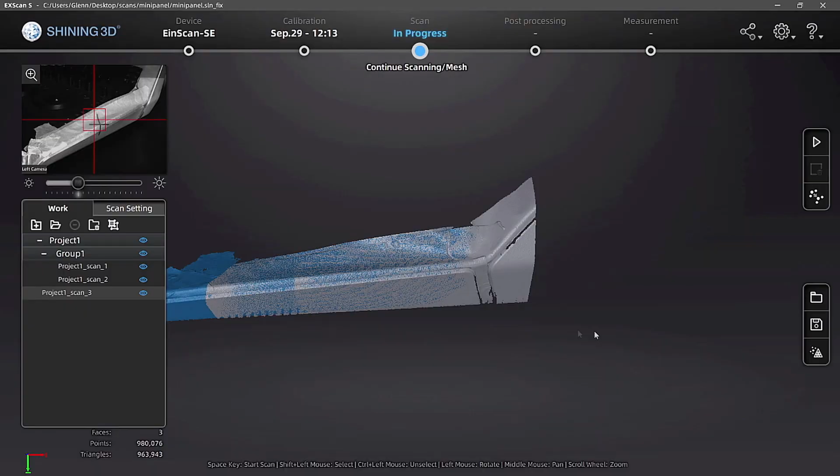In previous videos we have scanned a Resolve mini panel. We have used that scan to build a box for the Stream Decks. We then changed our mind about that box and we rescanned the panel to get a more accurate scan, and build a box that was more of the curved shape of the Resolve mini panel. Along the way, we took that shape that was very flat on one side and decided we were going to make it more curved so that the Resolve mini panel would sit a little closer to the edge.

At the time, you'll remember I said I don't think I'm going to fill in that gap entirely because that will end up being a lot of wasted plastic. Well, of course, I changed my mind.

I have adjusted that curve even more so that the next model you see will have an even bigger curve going underneath the Resolve mini panel. I also adjusted the curve at the top so that this angle is no longer flat. This angle as well has a curve on it to follow the Resolve mini panel. I did those off camera just because they're the same techniques we've been using in other parts of the videos.

So I think it's time we start jumping ahead to the trackball. And today we're going to do the trackball. We are going to rescan the trackball, scanning the side and the bottom of it. We're going to bring those shapes into Fusion 360, and that will help us get an overall shape to help cut a hole in our trackball box. So let's get going and see what happens.

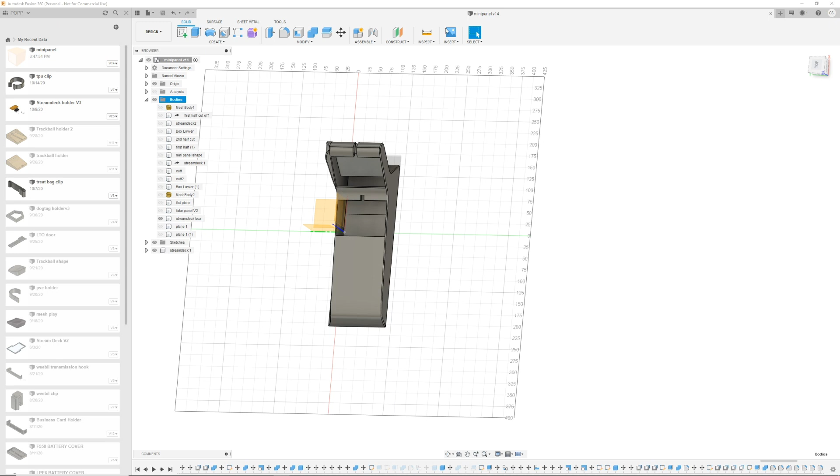We want to put a trackball right into this little section here. The idea being that the trackball is going to sit on an angle that is flush with the angle of the top of the mini panel, and we also have a very specific shape in the trackball. So we want it to sit in this part of the box, but we want it to look nice and custom. So what I've done is I've gone and rescanned my trackball.

I've got a side view and a bottom view of it. We used masking tape and Play-Doh to get a nice perspective and a nice scan on the trackball. And we did 2 different scans, one for the side, one for the bottom.

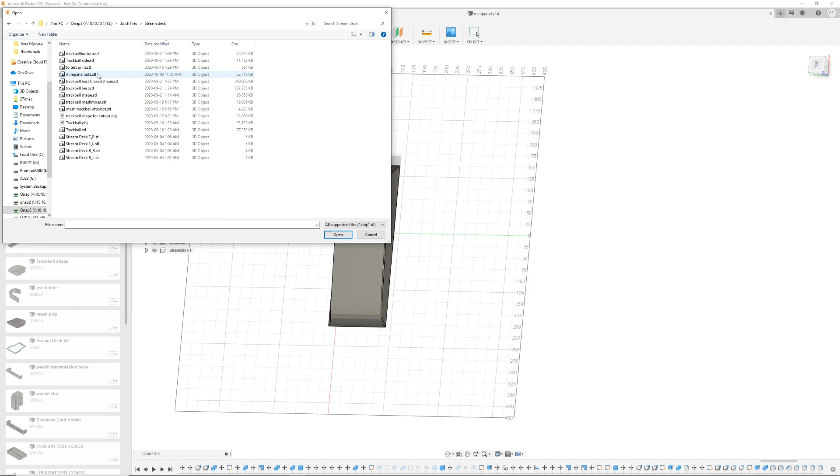So let's bring in the side scan. And once again, I do have to do a little bit of maneuvering to get this to be the right orientation next to the mini panel. So I'll just take care of that.

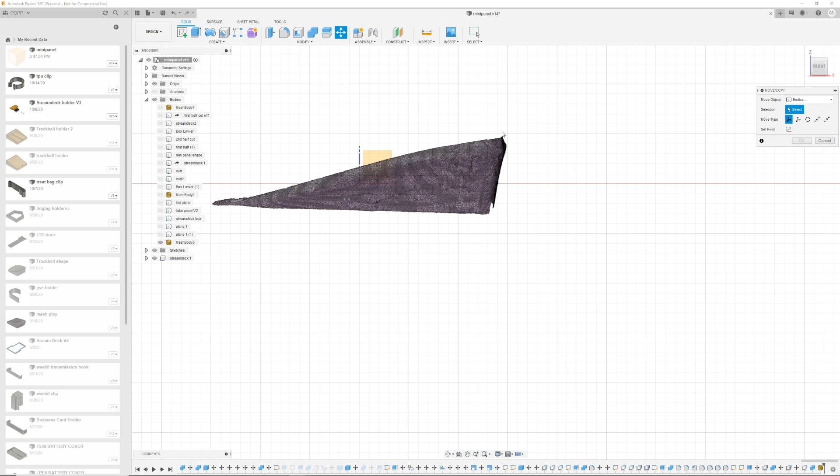Okay, so this is the angle we want to match to the trackball. And we're going to want to angle this so that this is actually flush with the top of the trackball panel, the mini panel.

Our next thing we will have to do is bring in the bottom of the trackball and go through the same process of twisting and turning and spinning and flipping and rotating and trying to get it nice and flat on our drawing.

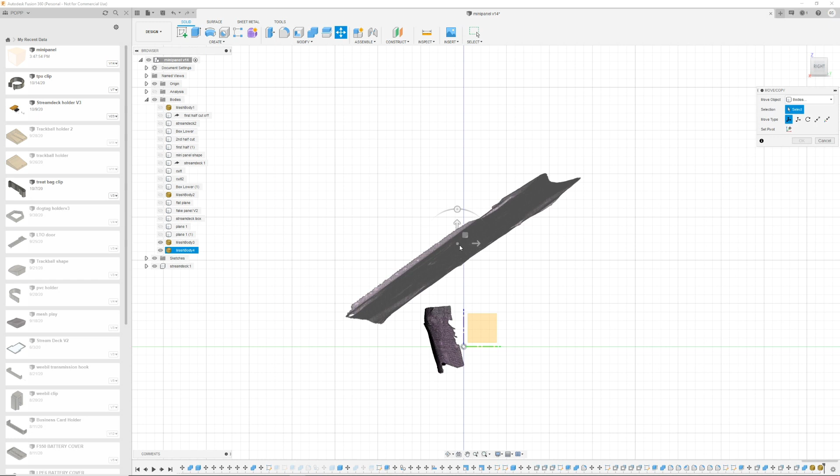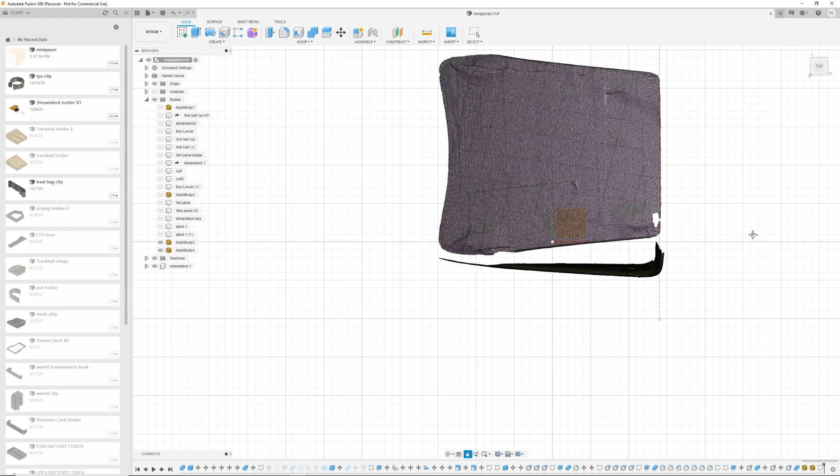So once again, I will work on this and we'll get it into position. So that's pretty good. We've got the base lined up and we have got the side lined up on this angle. So together we should be able to build something now to get this trackball shape into our system.

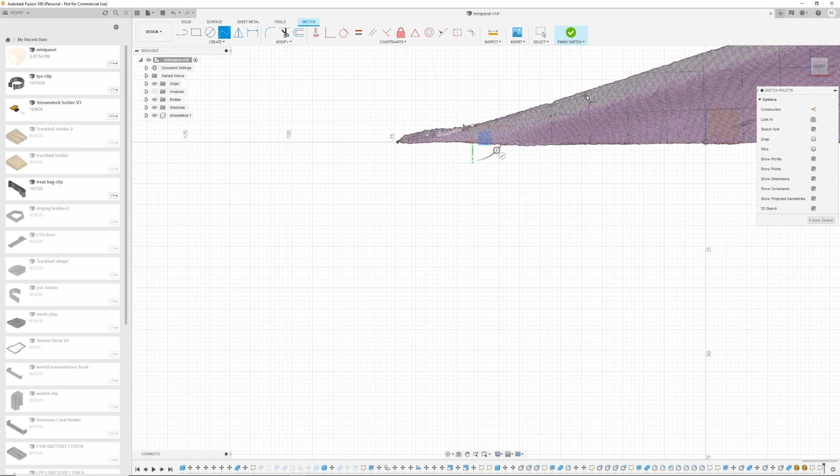So we're going to do the same thing. We're going to build a sketch. We're going to trace out the side and the bottom of the trackball to get a cleaner version now. Again, the scan just helps us get that original shape into the program. So as I whip through this sketch creation, we'll come back once we get this all straightened out.

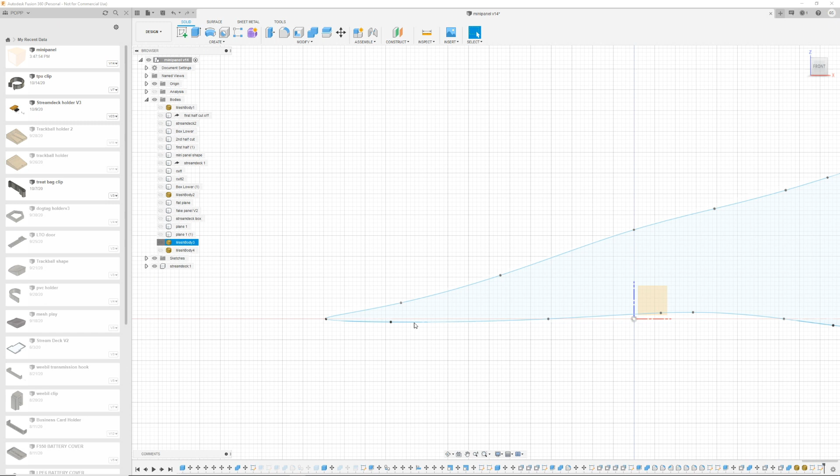And that looks pretty good for the side. Just a couple of minor tweaks here and there. But again, we just want to get that top angle close. We're going to take this and we've now basically extruded that out and get a fake view from the side of the trackball.

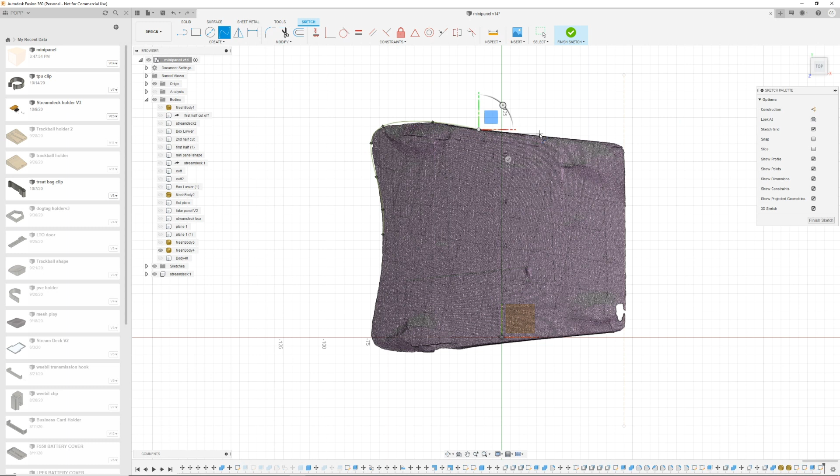And we're going to do the exact same thing now on the bottom. We're going to trace around it, smooth them all out, straighten them all up, and try to get this shape as close as we can to the trackball shape from a bottom perspective.

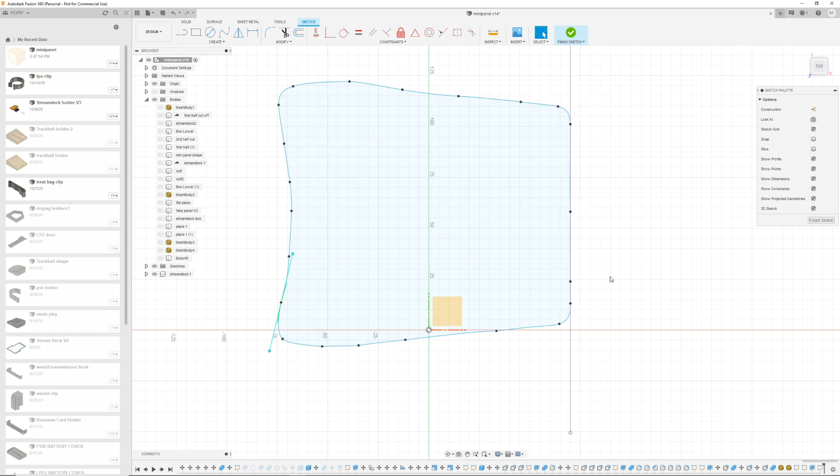Once we have that, we'll do the same thing and extrude it out. It doesn't have to be a specific size at this point, but we'll get it to where we have a fake trackball from the bottom perspective and a fake trackball from the side perspective.

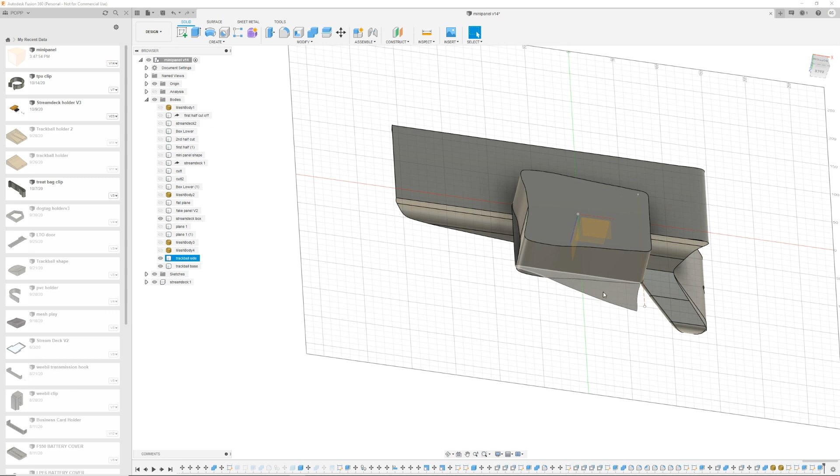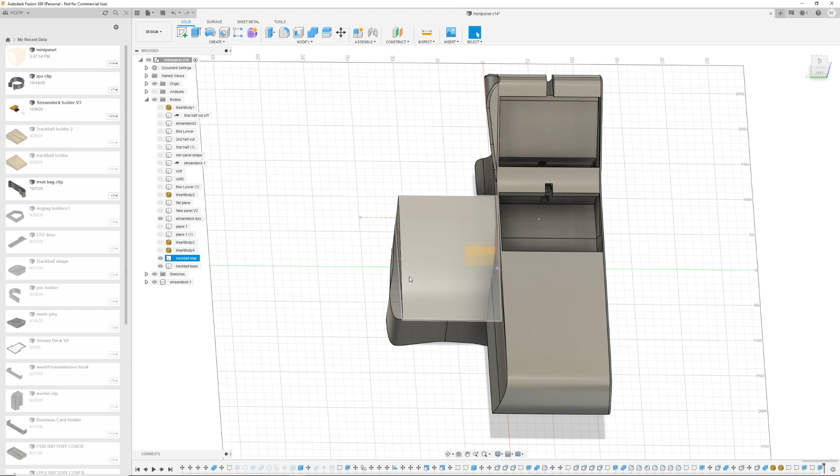We'll line these up now to try to cut our hole into our box. Now what I have to determine is the height the trackball has to sit at in this box, as well as the angle. We can use the side view we've built for the angle, but the height is more difficult because the shape of the base is an arbitrary up and down height.

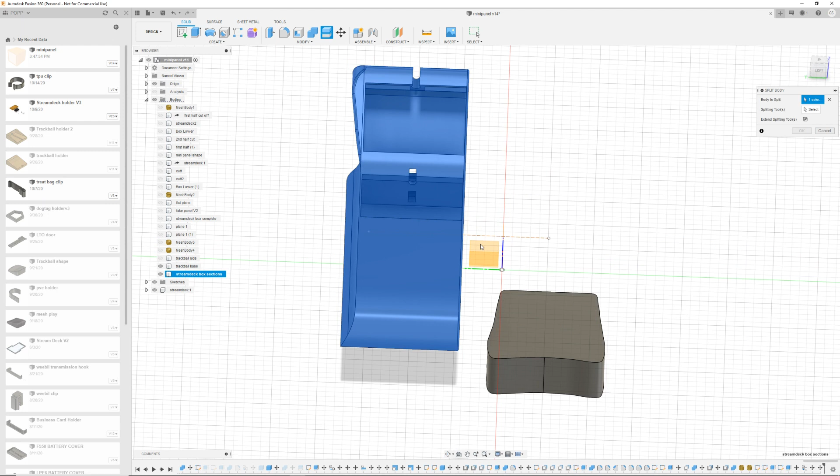I can see right here that we're going to have to extend the size of our box out a little bit, as our trackball is a little bigger than what we had allowed on our original build.

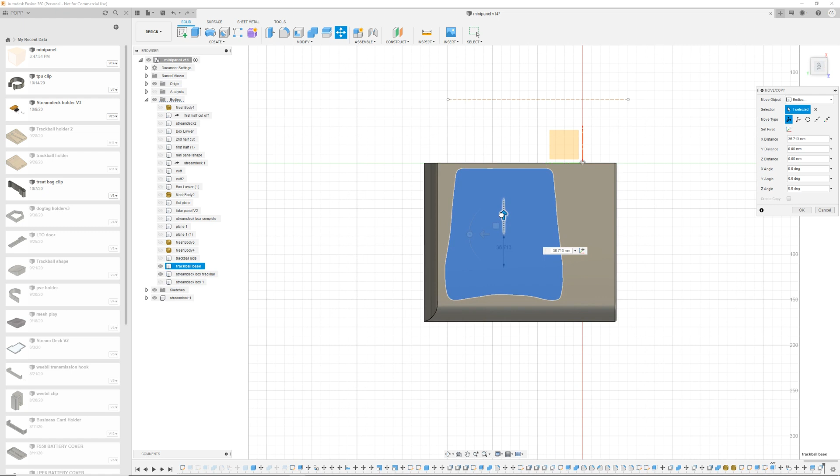Now that we've expanded the size of the trackball section, we can comfortably lay our trackball base into it to make sure it fits. This will be the basis for cutting out a hole in the trackball box.

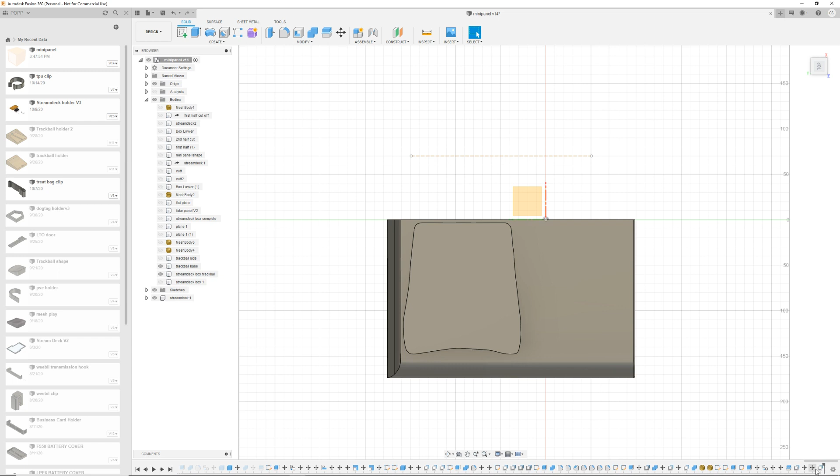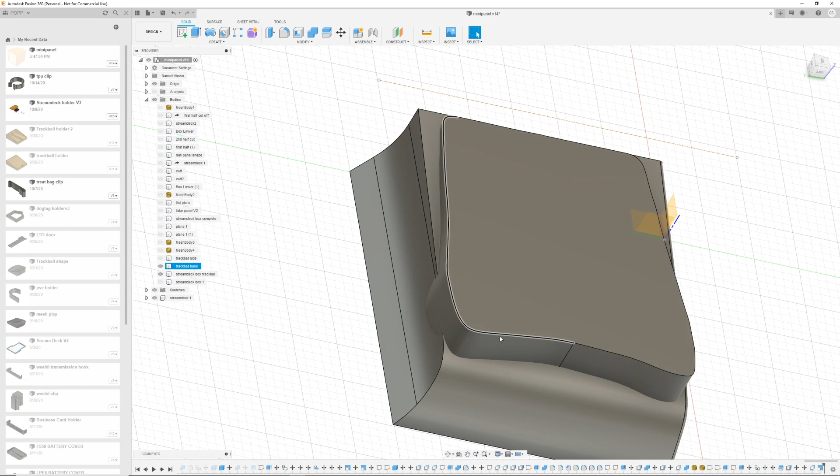To make sure the trackball fits into this hole, I'm scaling up the overall shape by 0.04 millimeters. If I do too close of an exact match to the trackball, it won't quite fit, because 3D printers just aren't that exact in what they're printing. So I'm ensuring I have enough space all the way around for the trackball to sit into this slot.

By expanding that up 0.04 millimeters, I'm faced with the same issue of the box being just a little too small to fit this trackball in. So once again, I'm going to have to extend the size of this box.

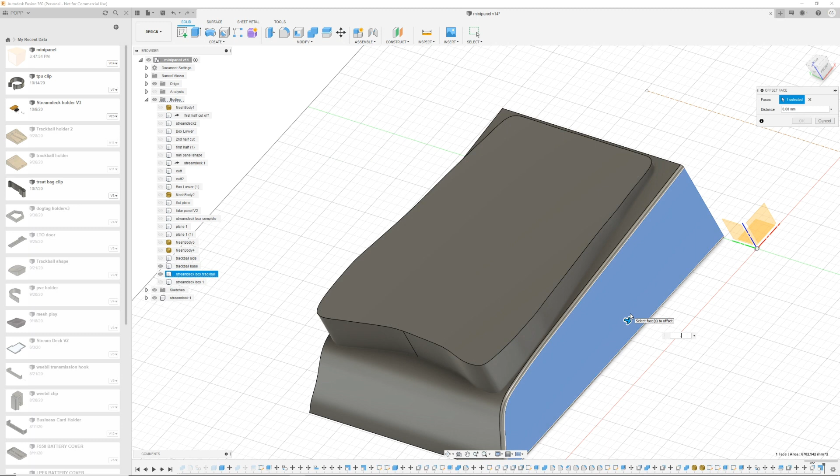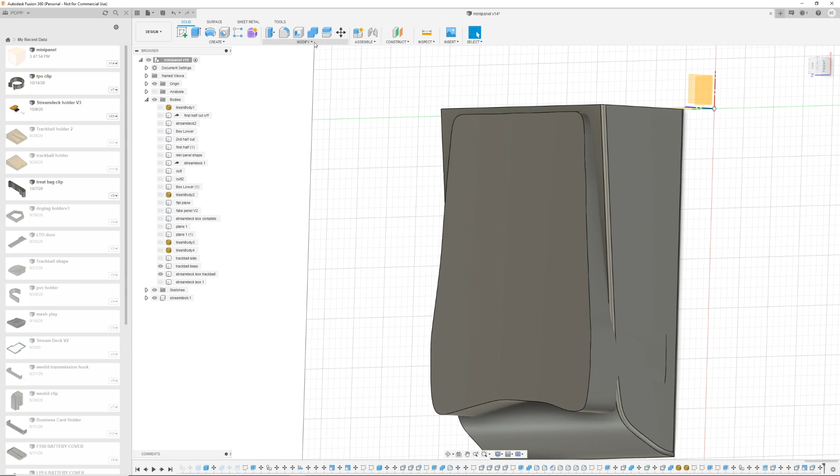We want it to be fairly tight on the sides, but we want to make sure we have some support material on the sides of the box. There's no use in getting too tight to the edge. Let's make sure we have a bit of comfort zone so this isn't going to fall apart if we bump into it. Let's make sure we have some structure on this box.

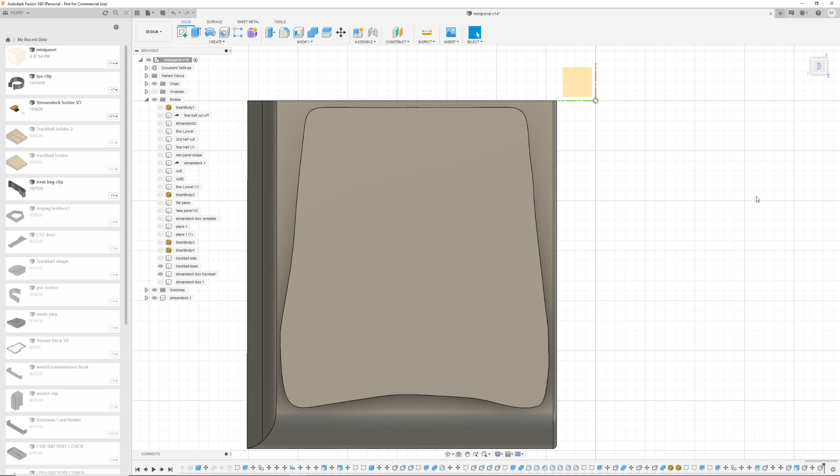Typically I go with 4 millimeters on the sides, I find that to be a nice piece of plastic on a frame to make sure it's sturdy enough. I think we now have a box that is big enough for the trackball to sit in, but not too big that the structure is going to be weakened.

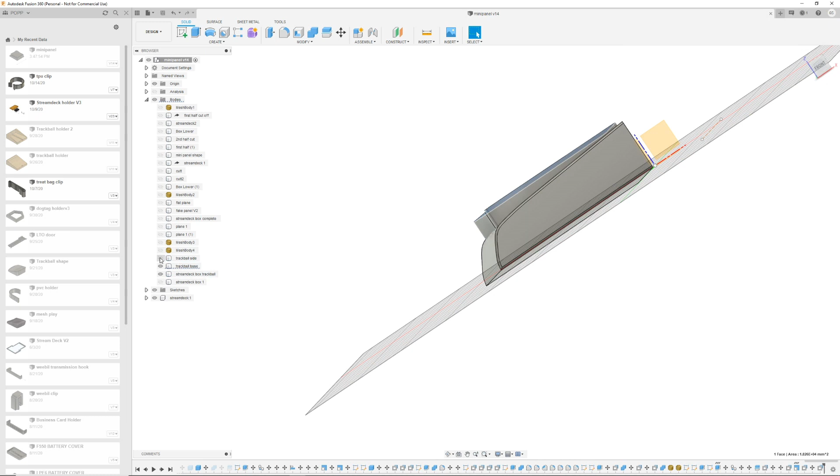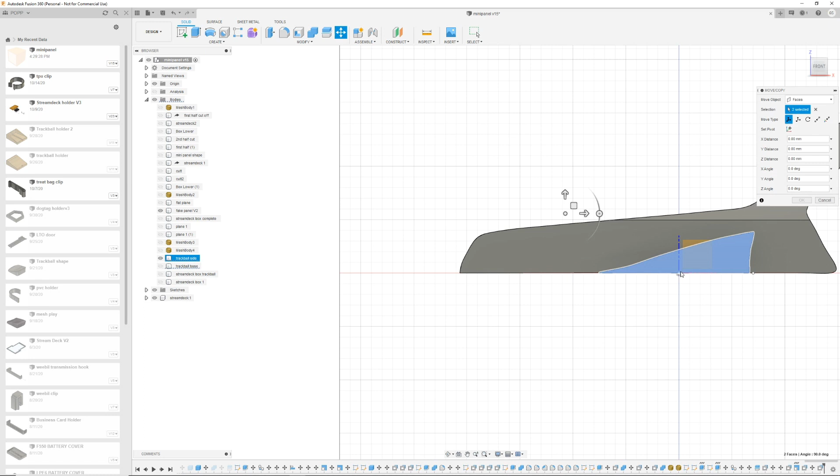Now we have to determine the angle this trackball cutout is going to sit at, because I want the top of the trackball to be in line with the top of the mini panel, where normally the trackball sits at an angle from back to front going down. We want to adjust for that angle and almost make the trackball appear flat against the mini panel face.

So again, I've got the side view of the trackball now, so I'm going to bring it in and try to get it as close as I can in perspective to the side of the mini panel.

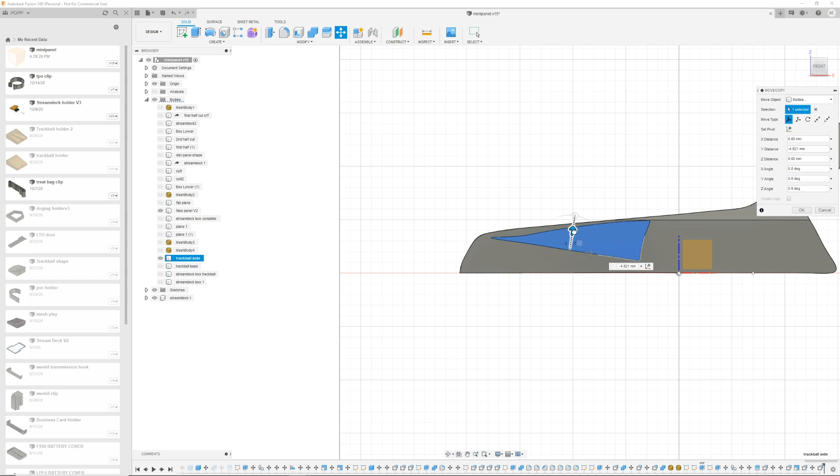Using the sizes and shapes of the trackball that we've built, I used the trackball base shape to cut a hole in our trackball box, the same way we cut our StreamDeck hole in the StreamDeck box.

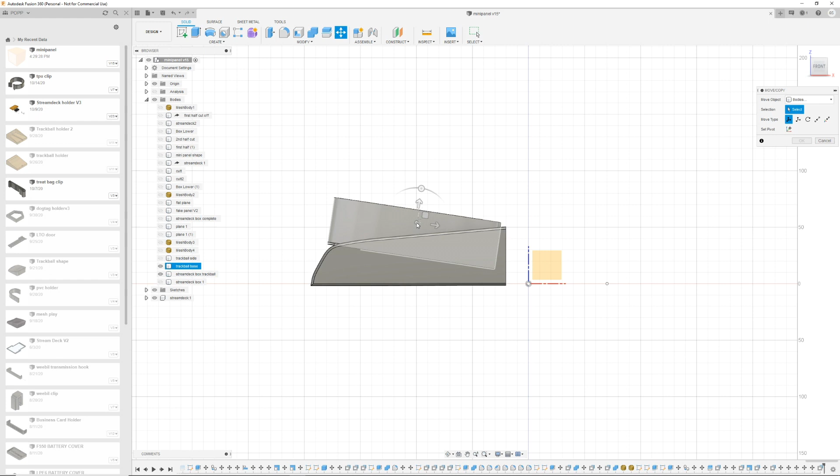What I found was I needed more than just that base shape to cut the hole, because I want the angle of this trackball to sit at the same angle as the Resolve mini panel. The problem was the shape of the trackball feet, when extruded up, was great, but it wasn't at the right angle.

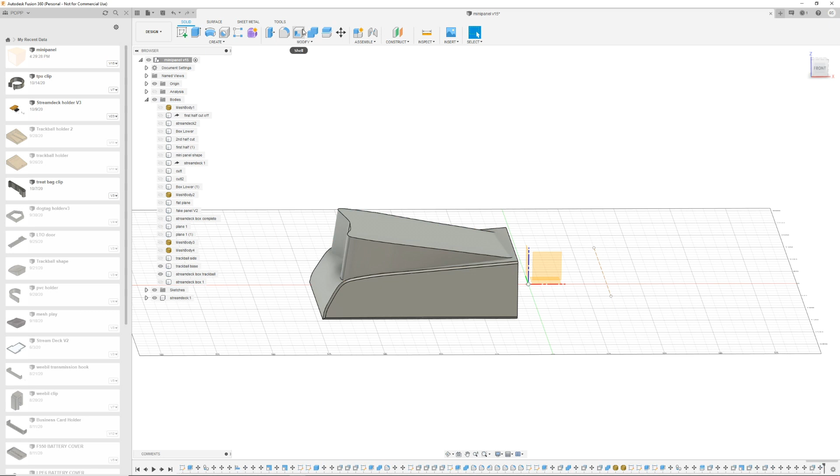So I was cutting straight down into the box when I needed to be cutting at a bit more of an angle, and the combination of that angle and that depth was very hard for me to come at. What I figured out I needed to do was combine the two shapes, the shape of the base extruded out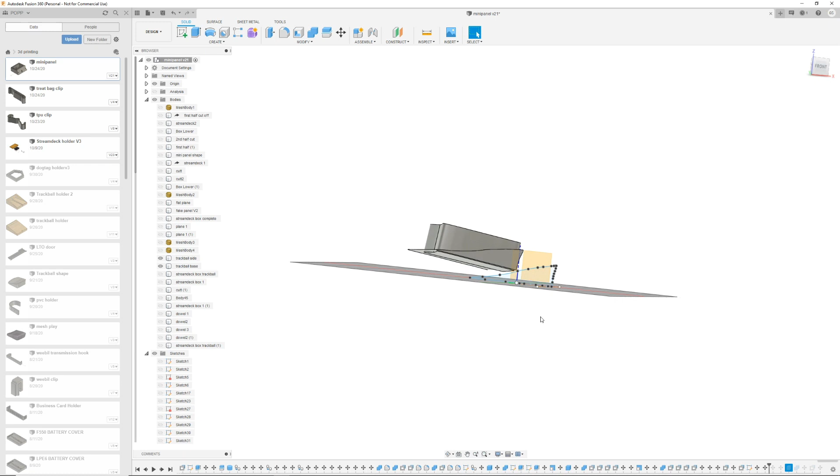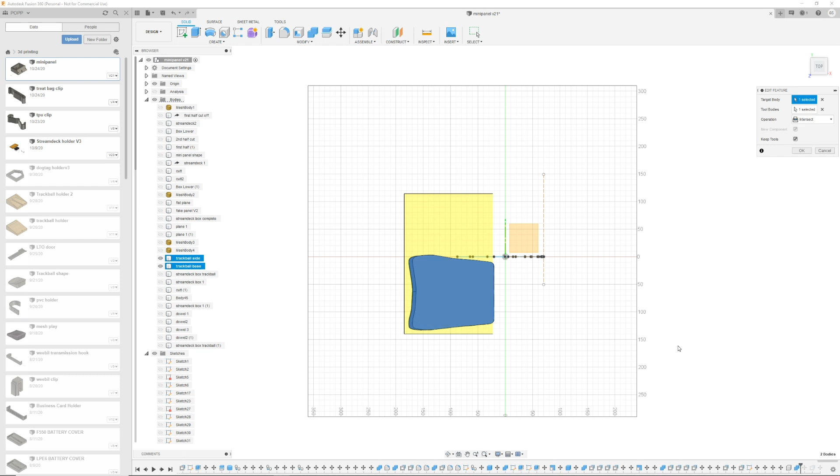and the shape of the side extruded out. I needed to combine both those shapes into one shape that more accurately represents the trackball. So I did an intersection combine, taking those two shapes and combining them together with the intersection tool. That cut everything away except where the two shapes intersected, leaving me with essentially a trackball shape in 3D from both the top and bottom perspective and the side perspective.

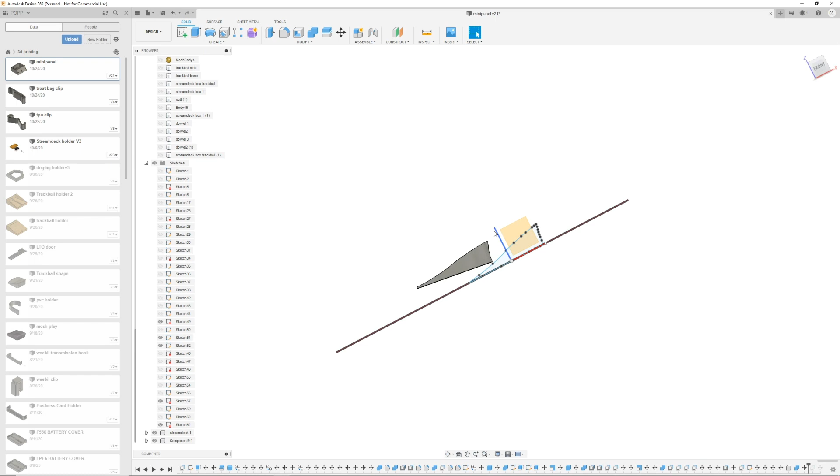I could then use that to cut a hole in my trackball box. That left me with the proper shape, the proper depth, and the proper angle of the trackball to fit into this box. So let's take a quick look now at the cross-section analysis of this, and we can see that we've got a nice strong base all the way through.

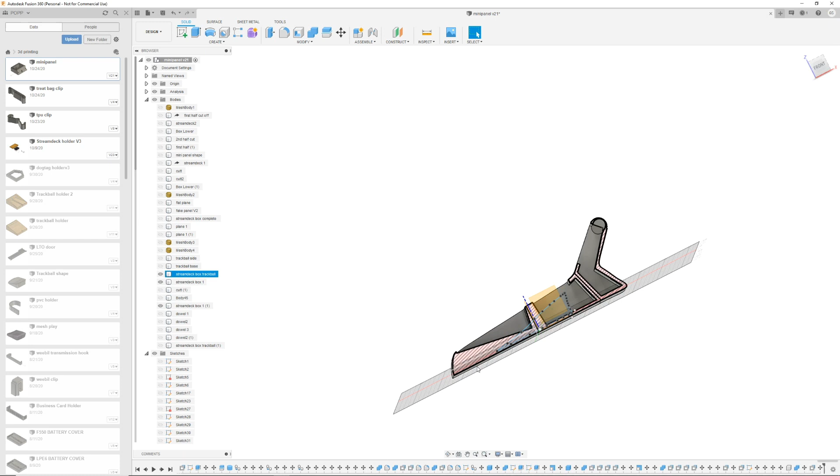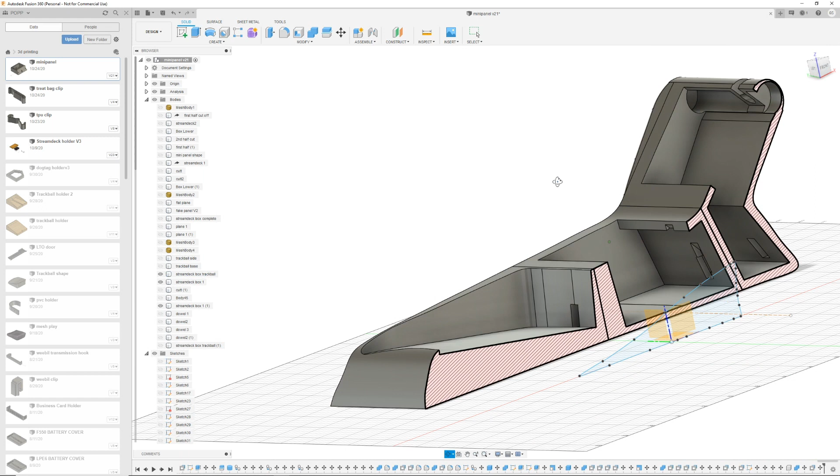We could try to hollow this out, but that might end up just needing to be printed with support material anyway. So I think this is what we're going to end up using as our trackball shape. It's a little thicker on the bottom than I had wanted, but I think we will survive.

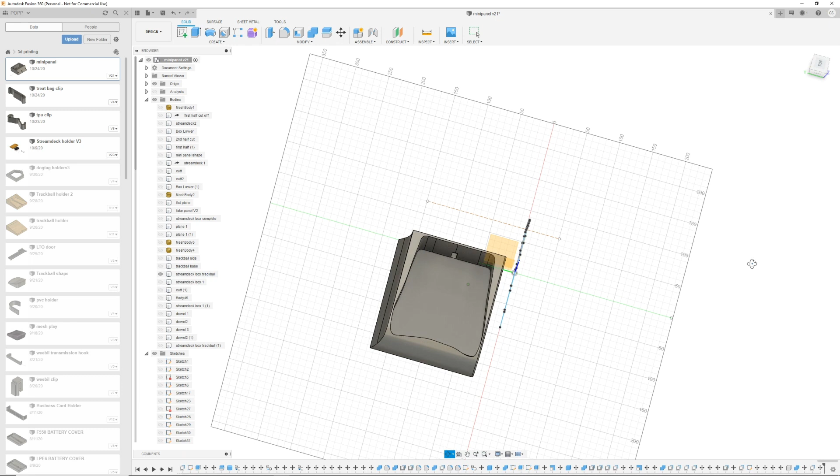And as you can see now, I've expanded all the sides so everything matches up. The boxes, all three boxes, are now the same size width-wise, and I've made the trackball holes centered up on those boxes. We're all good from that standpoint.

A little bit of back and forth on that section, trying to get the size of the trackball and the size of the StreamDecks to all line up. Took a little bit.

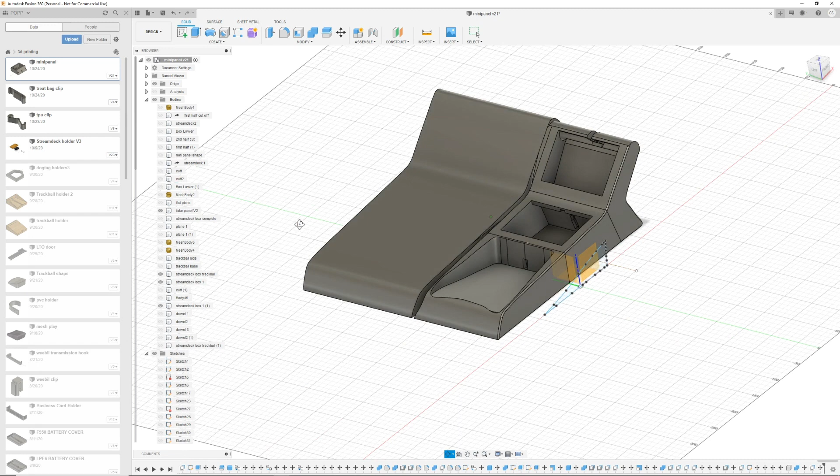And you can also see on the top trackball, I did round it off a little bit more. I put the angle in to try to fill in between the top of the trackball and the top of the mini panel. I wasn't sure if I wanted to do that, but I decided in the end this should match as closely as we can. And as I had said earlier, we adjusted the angle going underneath the trackball or the mini panel a bit as well, so we have a little steeper angle cutting underneath the mini panel.

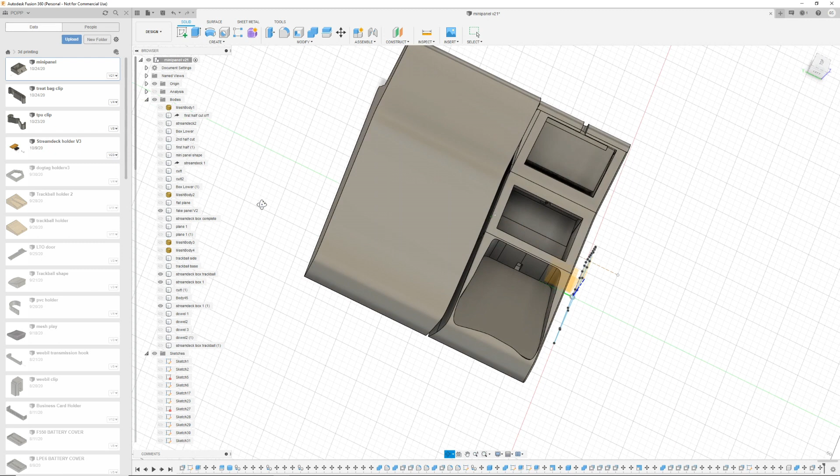Just little tweaks here and there to try to finish this off from a visual standpoint, to make it a little cleaner. So just to explain what's going on here, a little change in what you're probably seeing: the StreamDeck boxes are smaller than the trackball box, and that's not what I want. I want everything to look like one big box in the end.

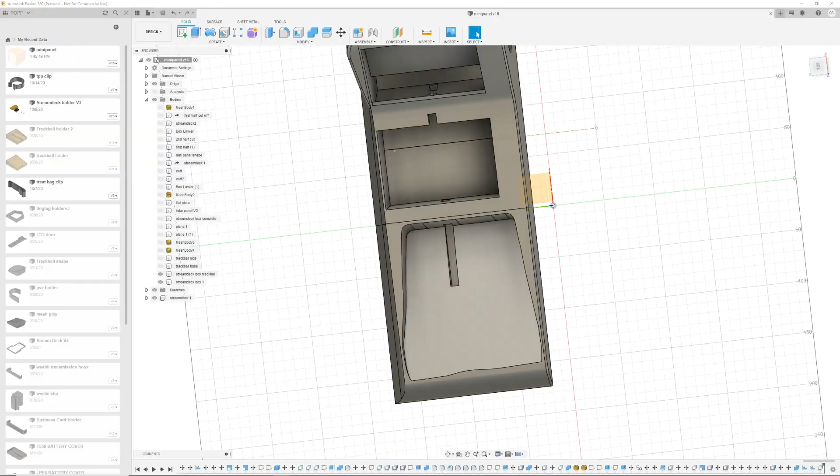So as I had to expand the trackball box out to get it to fit the trackball, I then had to expand the StreamDeck boxes out by that same amount. That left the cutaway for the StreamDecks no longer centered on those boxes, so then I had to move the cutaways for the StreamDecks over as well to compensate.

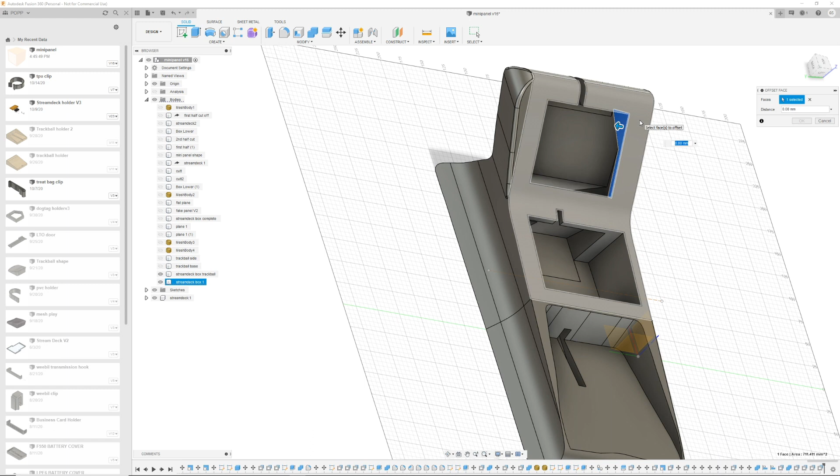In the end, it leaves me with one big box that is the right size from top to bottom, and everything is centered on that box. But I just wanted to explain to you why it maybe looked a little bit different in this video than it did in the previous video.

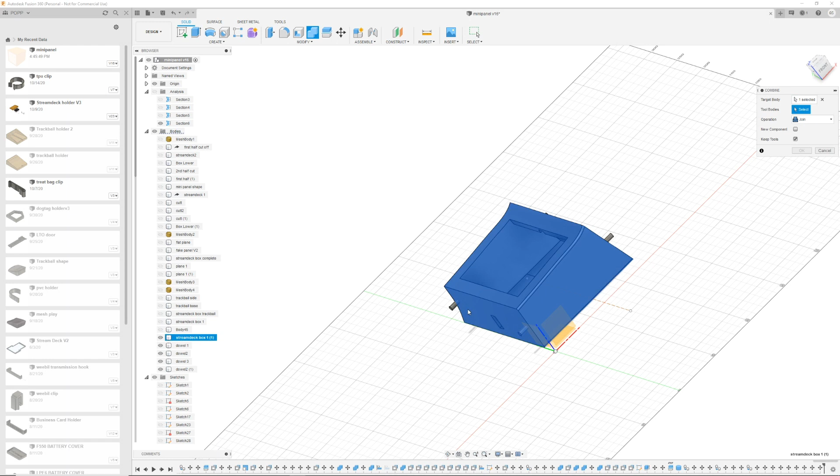Now, in order to print this, we have to break this into 3 parts. And in order to put this back together after we've printed those 3 individual parts, you'll see that I have put some pins into each one of these sections. Just basic cylinders that I'm going to combine into a middle StreamDeck section, and then I use those cylinders to cut a hole into the front trackball section and the rear StreamDeck section.

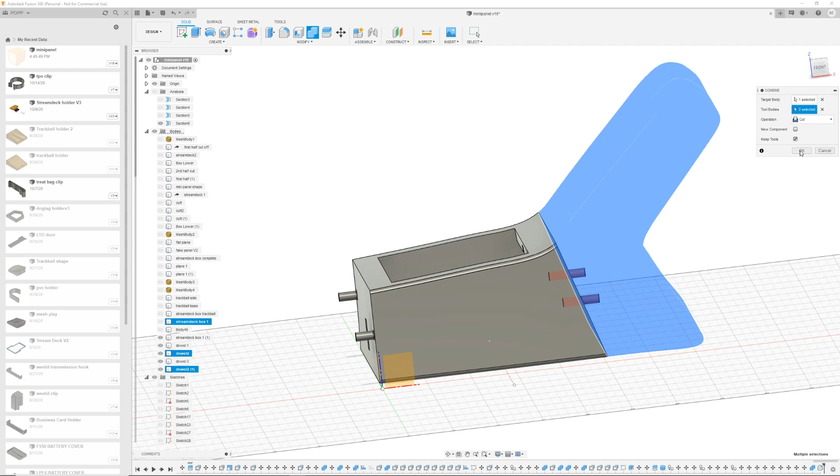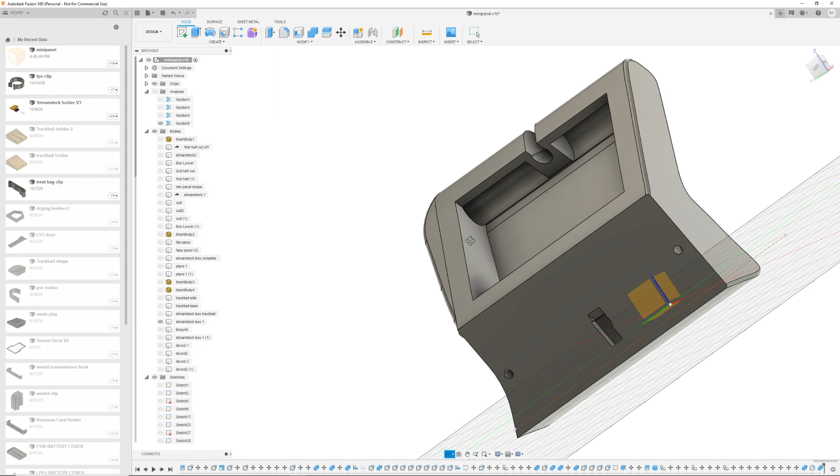So now we have to get these pins to cut into the other two sections of the box. If I turn on the back StreamDeck, we're going to use that pin as a cutting tool, and we're going to cut into the trackball, or StreamDeck section. We made sure to line these pins up to a point where they were going into the trackball section and the StreamDeck section where there was plenty of plastic material. So it's just a matter of selecting the pins as a cutter, selecting the StreamDeck section as the section to be cut. I want to make sure I keep my cutting tool around because I need those pins to stick around.

That leaves us a hole in the back StreamDeck section for those pins to slide into. Now, the fact that the pin holes are the exact same size as the pins right now means more than likely they won't fit together. 3D printers just aren't that precise when they print stuff out like this.

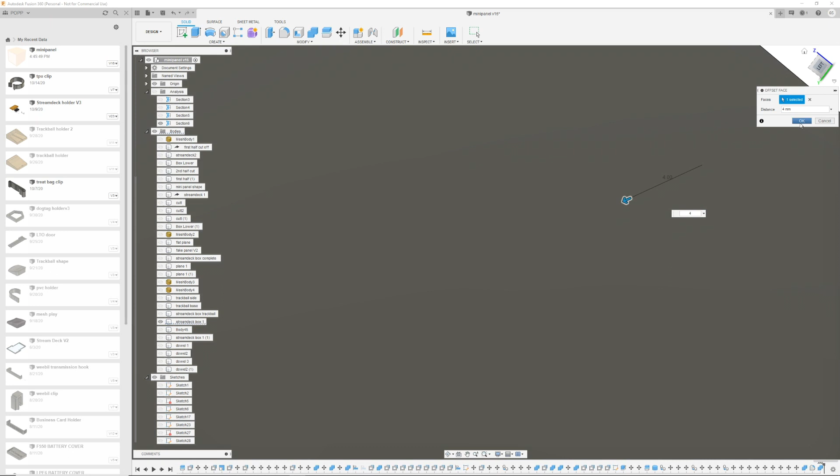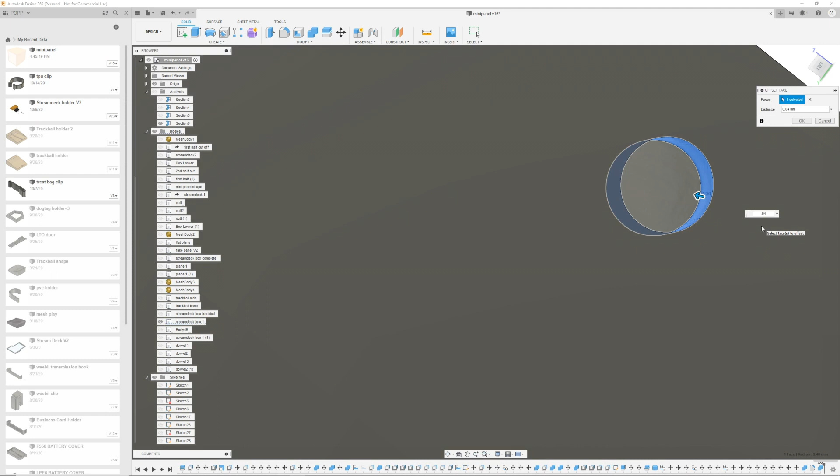So what I want to do is go into each one of these holes, and I'm going to expand them so that they're a little larger. I think I usually do 0.4 millimeters bigger than the pin that is going into the hole. That's just kind of experimentation on my part from previous models, depending on my printer. For my printer, I've found that this 0.4 millimeters is a nice area where the pins will slide in but not fall out. They're tight enough to get in, not so tight that they break while I'm putting them in.

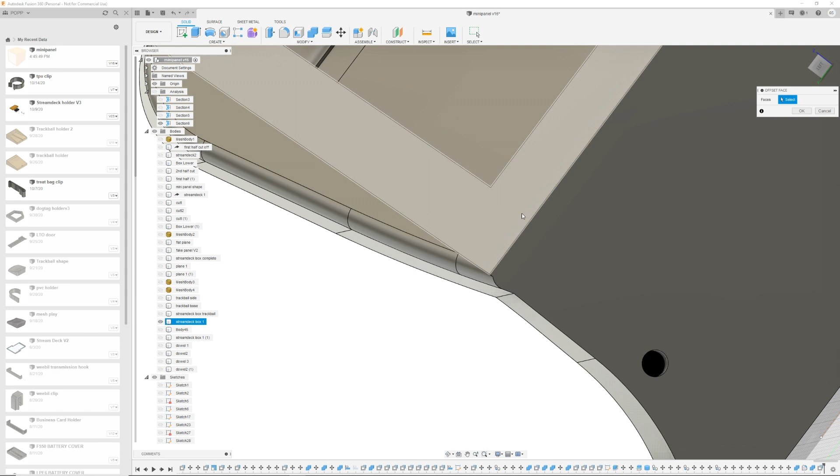If I want to glue these pieces together, I could. If not, there's probably a pretty good chance these pins will be strong enough and will hold tight enough that I won't need to glue them. But I'm going to do this on all of the holes that I end up making for the pins. And then once we're done on this back section, we'll do the exact same process on the trackball section.

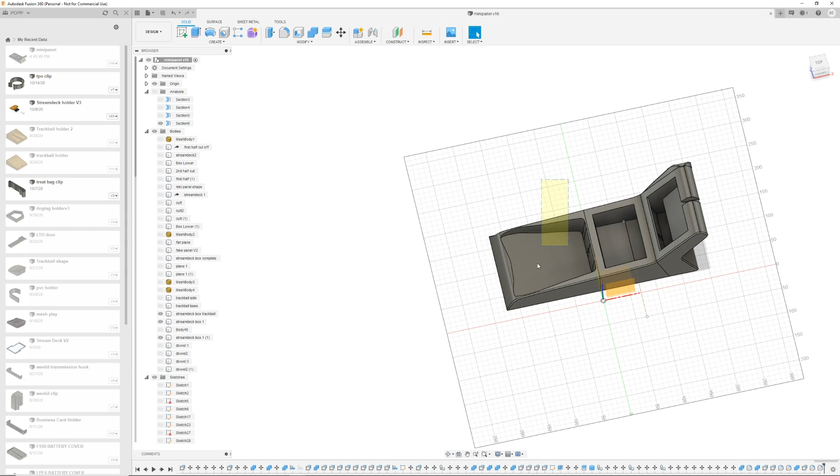And here you have the three pieces that I want to send to the printer. So we're going to select each one of these sections and individually send them to our slicing software. We use Cura for our slicing. A little bit of numbers for you right now.

The StreamDeck Upper took 31 hours to print. I kid you not. And this is a time lapse of that print, 31 hours. StreamDeck Lower took 18 hours, just about 19 hours to print. And the Trackball took 17 hours to print. So by my math, we're looking around 60 hours of 3D printing time.

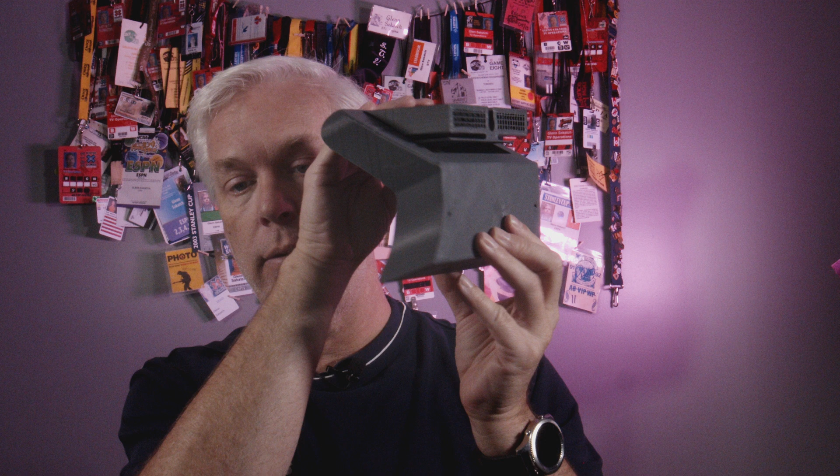And that will leave a nice exposed hole underneath, where the StreamDeck will go right in here. But because it was printed in this orientation and the angle in here in this hole, I wanted to make sure it didn't collapse during the print, so I put support material in here. A little bit of wasted plastic, but on a 31-hour print, it's worth that little extra plastic so that I don't have to do this again.

So let's get the support material taken out of this and see if we can get these three pieces put together. Okay, time for the fun part, I suppose.

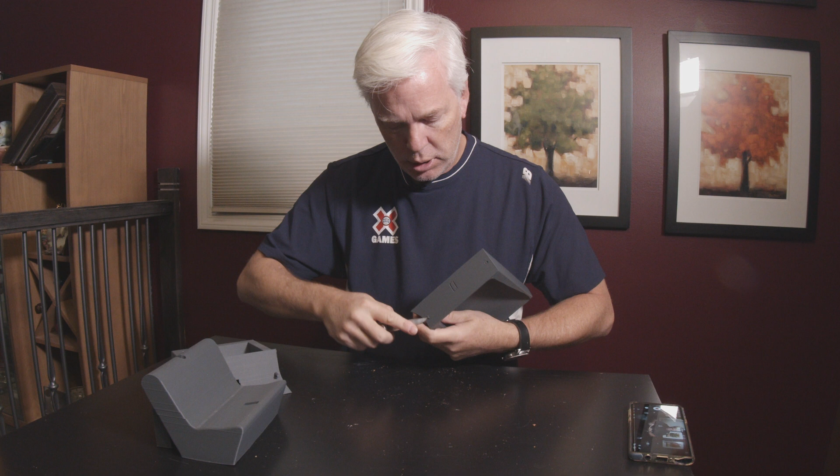Let's get the support material out. Every time you do a print over top of basically midair, you have to print support material. For the most part, it's designed to just pop out without too much difficulty. Now I know the trackball section, most of this should come fairly easily out.

So, I mean, that's essentially the trackball. Let's - this is like the moment of truth here.

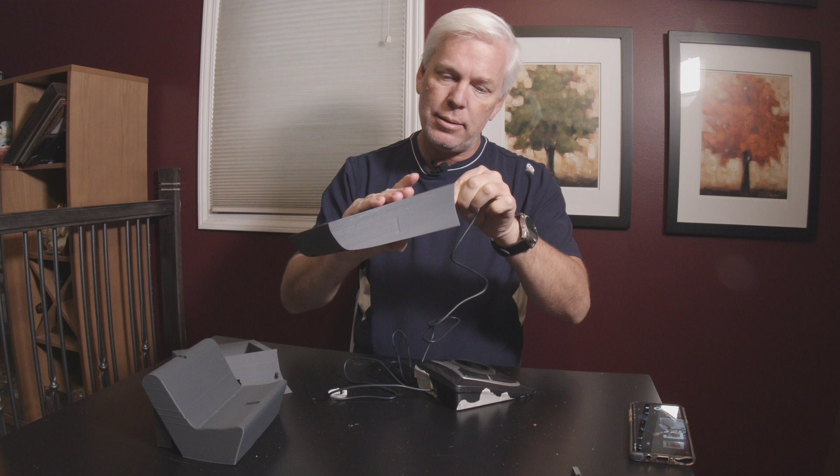Luckily, any of these holes that don't quite fit, we could always drill them out. And there you go - I've got a hole that doesn't fit. I've got too big of a plastic burr on this thing. But so we're going to have to - well, you know what it is?

It's the base going down intersecting by about half a millimeter, 2 millimeter, 1 millimeter, not even a millimeter. We've actually got a hole, but the base is covering part of that hole. So we're going to have to scrape that out with an X-Acto knife. It'll work, that'll be fine.

The actual shape is pretty good. Once the cable's going out the back, it'll sit forward - it'll sit back a little bit more like that. That's pretty good, I'm pretty happy with that. I think that'll fit in nicely with the mini panel.

Let's go to the midsection. This one's going to be a little more difficult because some of the support material is actually inside.

So our holes, same thing - if our holes aren't quite there yet, and they're not, we might have to take a little drill bit and just hand spin these, and we'll get those in. But that's not a big deal. I did a 0.04 offset to make these holes bigger, and I guess the printer hasn't been quite accurate enough for that.

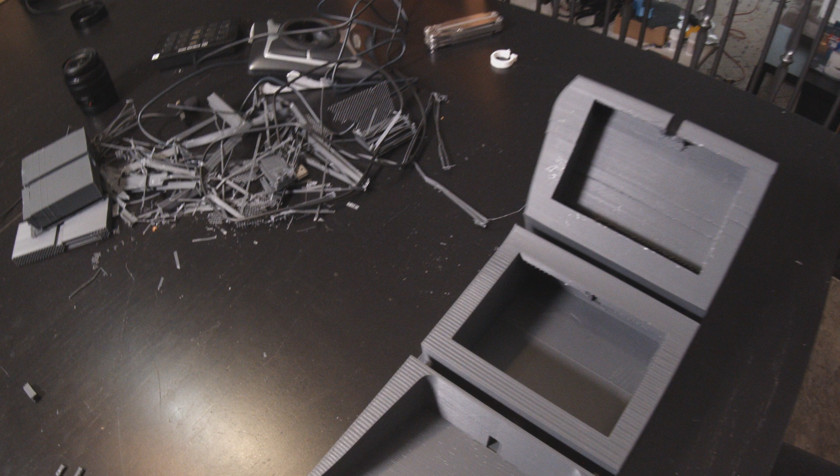But same process over and over again, you're just pulling plastic out. But in the end, I think we're really close. We have to expand our holes a little bit for our pins, and expand our holes a little bit for the USB cable. We'll just use a drill bit and hand do it on these, and that'll make those work. For the USB cable, I'll probably just take the Dremel and shave a little bit off of that.